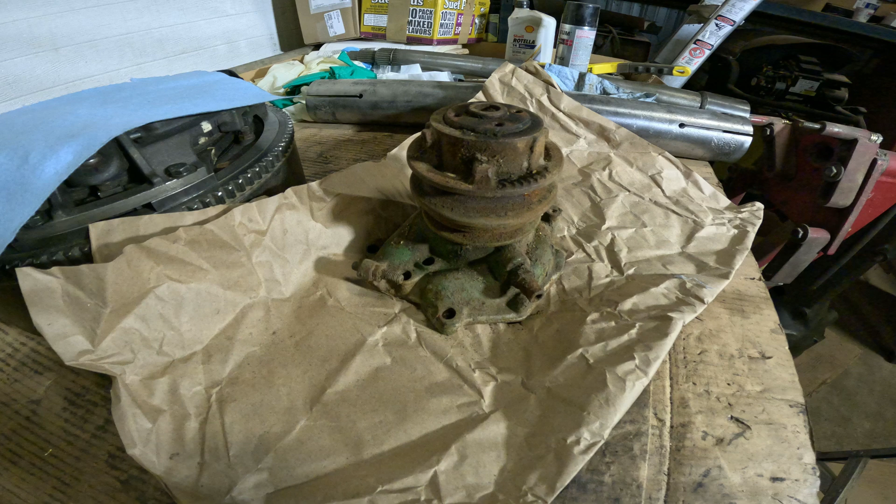In this video, we're going to document the rebuilding of our water pump that we pulled from our John Deere 430 two-cylinder tractor. This water pump would be the same style used on a 420, 430, or 440 from the Dubuque tractor series of 1956-57 through roughly 1960.

Essentially, all we need to do is drop a little money on it for some new seals and gaskets, and we're going to hit it with a little elbow grease, liberal coating of that. Bet you didn't know it came in an aerosol. And after that, an undetermined amount of time later, we should have a rebuilt water pump.

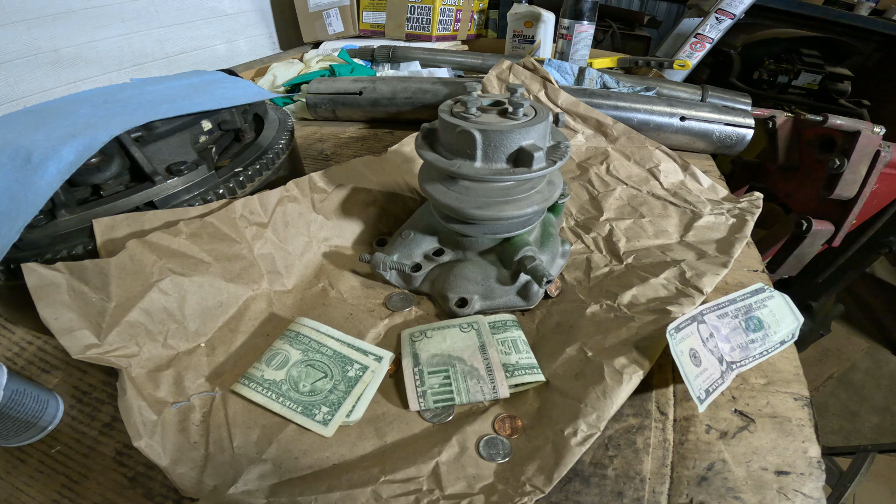That is the quick and simple version. If you're content with that, stop the video now. If you'd like to see what we did to get in the inside and pull everything apart, keep watching, because all those details are what's coming up next.

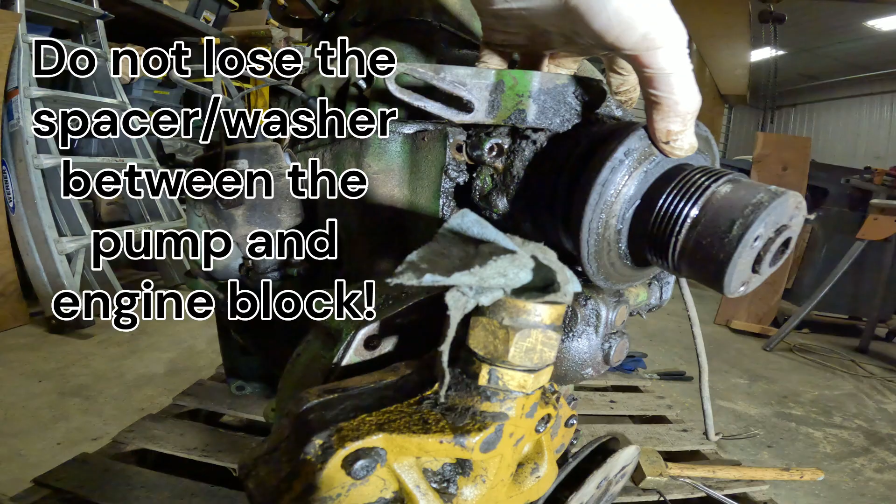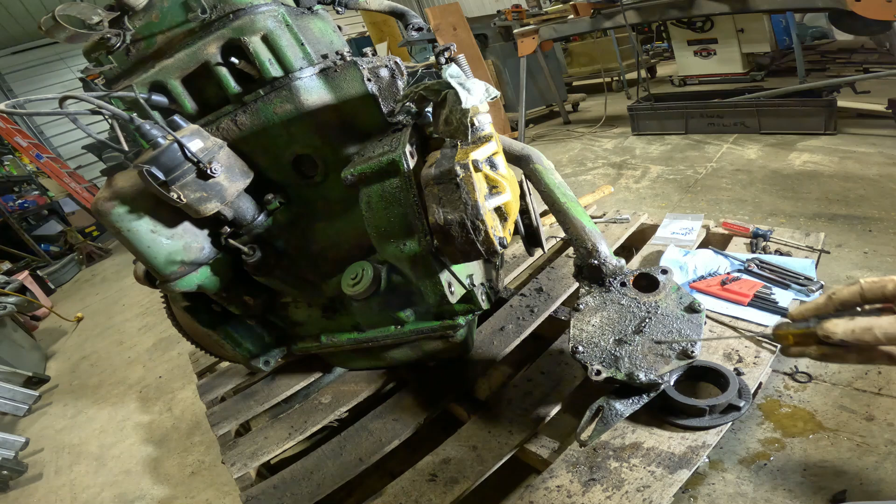Our water pump off the block, we can go ahead and take apart the return line, these two screws there and there, and then we'll start with removing this back cover with some Phillips head screws. That'll give us a view of our impeller and all the other fun things inside. We can also go ahead and pull our generator bracket off of here at the same time.

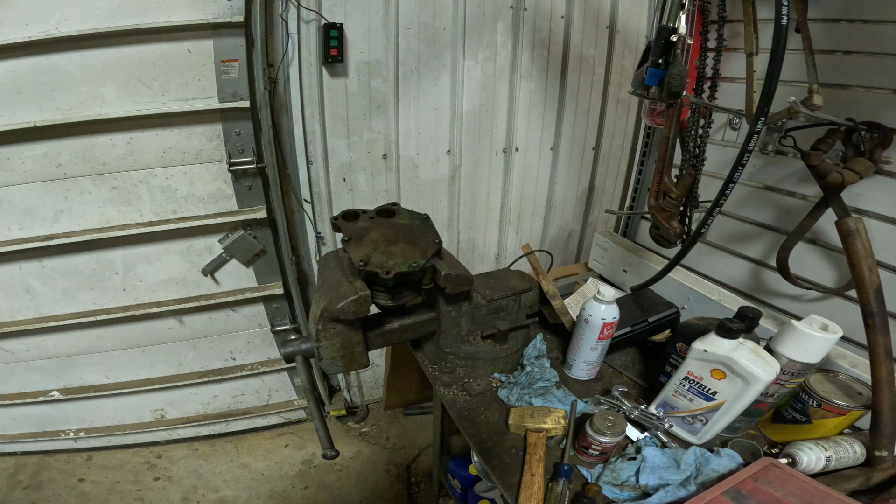We've taken a field trip over to the vise, locked our water pump in place to give us something to turn our screws against instead of having it flopping all around. I removed the cast return pipe that was mounted here with the two Allen head screws. Came off fairly easy. These big screws, you may get them out easy. I'll give them a little tap with the hammer, and you can try the screwdriver approach.

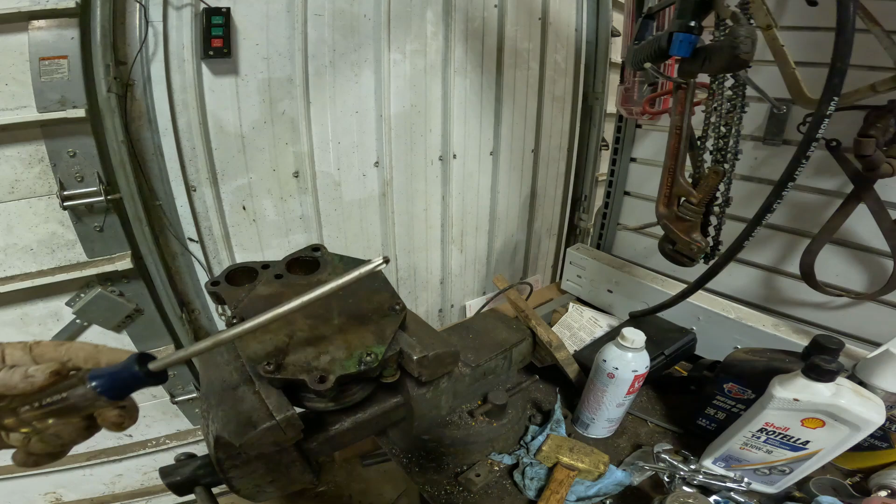I tend to get a little Phillips head bit that has an angle to the back end, and I'll use my socket wrench to give me a little more torque and turning, because they can be in there kind of snug sometimes. So let's see what we get.

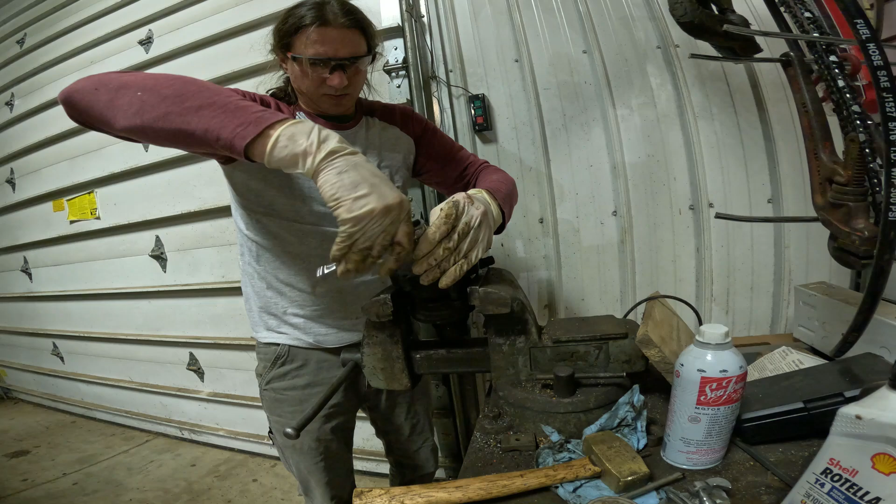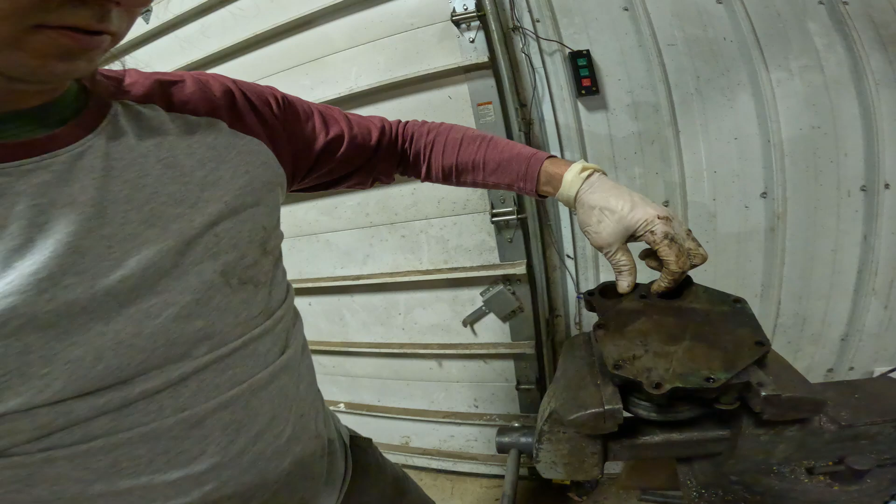We'll get this screw out. We'll pop our back cover off. We'll see how corroded it is, see what our impeller looks like that's waiting underneath here. Don't want you to miss the moment of truth. Oh, not as bad as I thought it was going to be. I'll throw that in the blast cabinet. It'll clean up well enough.

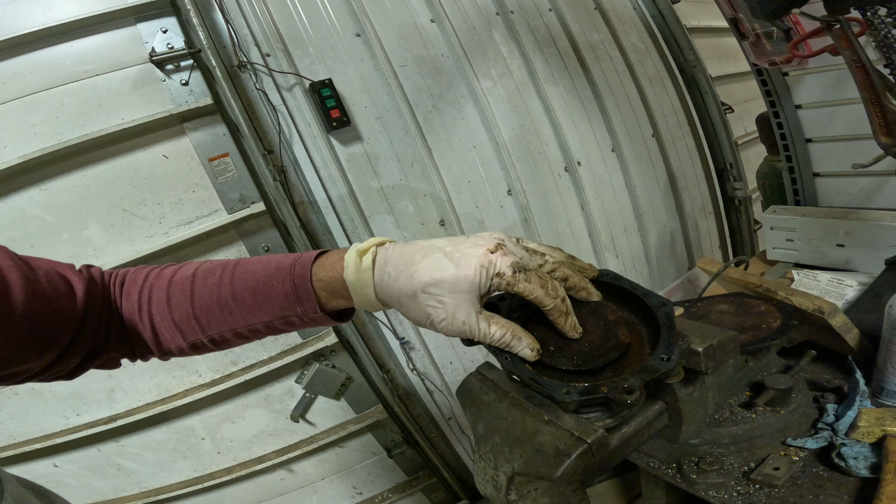Got our impeller, the shaft that the impeller rides on. One of the next things we have to do is remove our pulley from the opposite side. There is a clip on the inside underneath that pulley that holds the whole shaft in place. So we'll do some digging to see what we can do to get that pulley off the front.

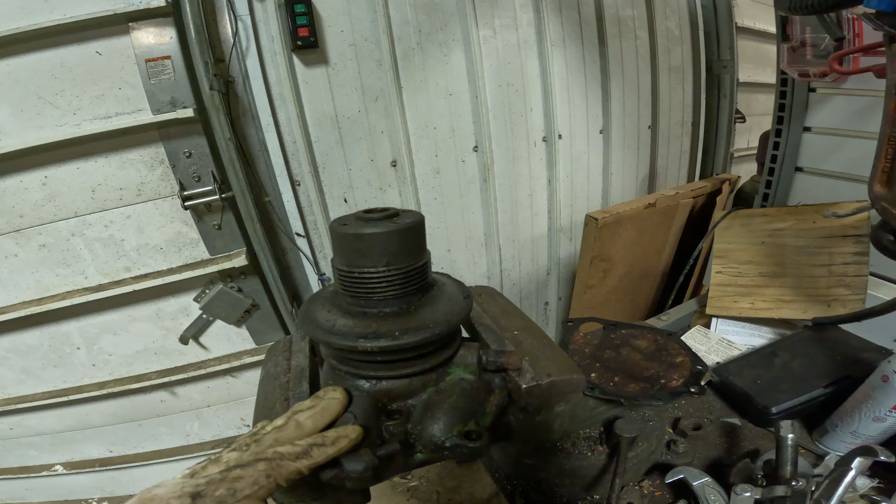To remove the pulley from the shaft on the water pump, I'm going to use a standard gear puller. The hooks of the gear puller are going to pull against the pulley and push against the shaft on the inside and pull it up. The push point of the puller is too big for the opening, so I'm going to take this little 5/16 bolt. Got the little nut on the end to give it a little bit of a dish. We'll drop that in there as a push point and see if we can't coax this guy to come off.

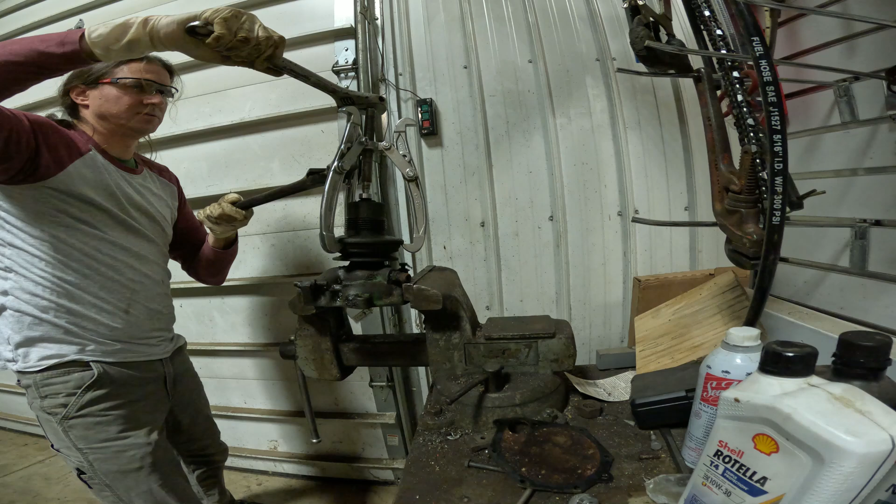Patience and persistence. Once I get this to the point where that nut is not enough height, I'm going to back this off. I think that's about where we're at. Back this guy off. Make sure you can see what I'm doing here. We are going to stack another nut up inside there. Now, put him on there.

Still not perfect. I'm sure there's a better way. You get that two-jaw puller that sits right down in there against that shaft, you might be far and away better off, but sometimes you gotta work with what you got. That's what we're doing today.

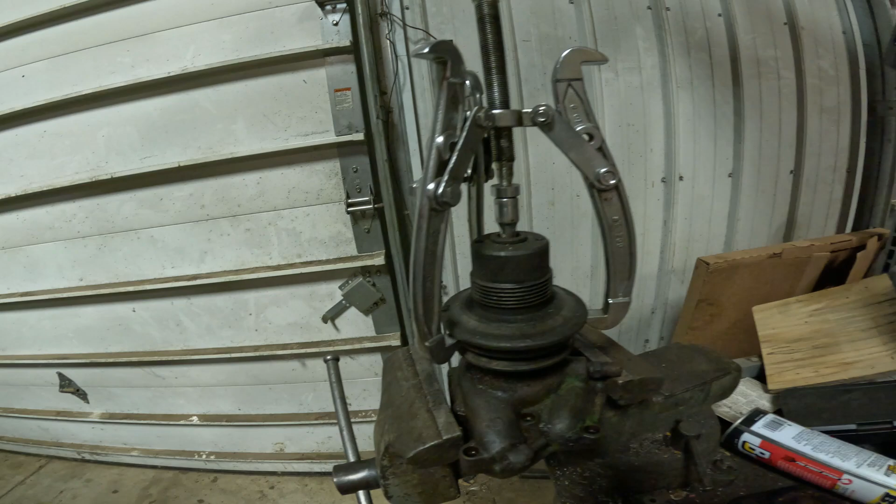We're starting to run out of clearance with all our nuts, so we swapped the nuts out for a small 3/8 socket extension, which is going to act again as a point to push on. And I think we're actually getting somewhere. Oh yeah. All that effort just to get our pulley off of that little shaft.

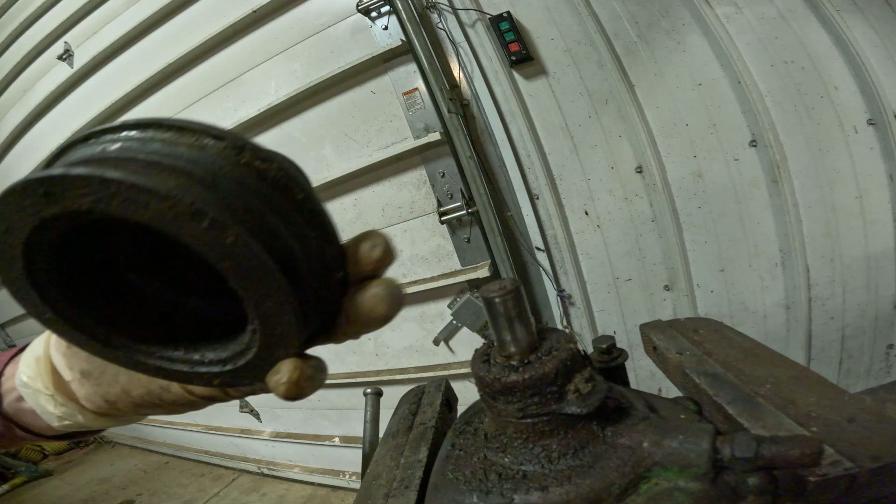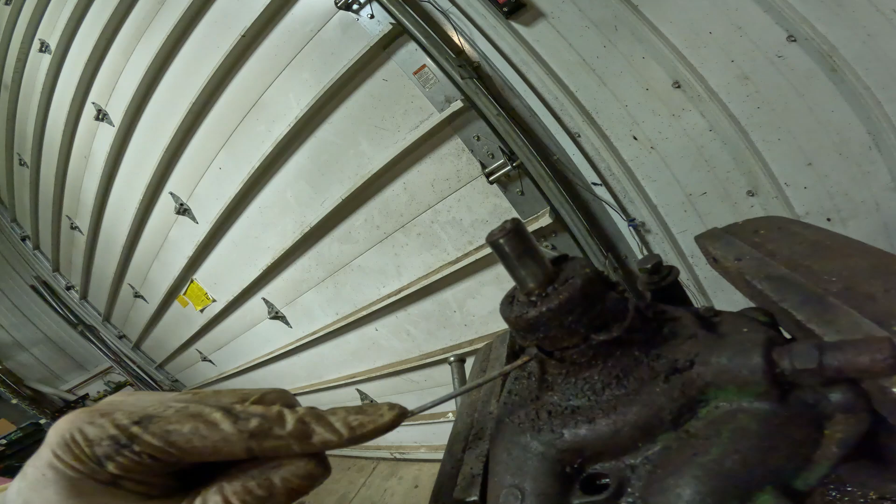Pulley, shaft, you can see how far up we had to pull them off of there. You can also, depending on how the lighting is, see this little clip. This clip right here, probably can't see, I'm up too close. That clip is what holds our bearing unit in the water pump housing. So we'll see what we can do to tease him out of there. These sometimes really get stuck in there.

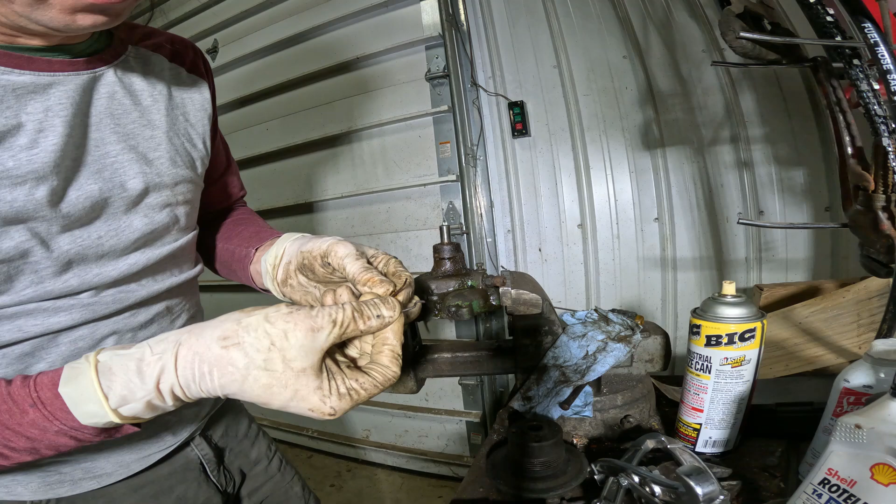Well, something's giving a little bit. There we are. As you can see, I might be able to salvage that. It's just a little bend in there. Probably what it should look like. So that should give us the ability to tap our shaft unit free of our housing. Now,

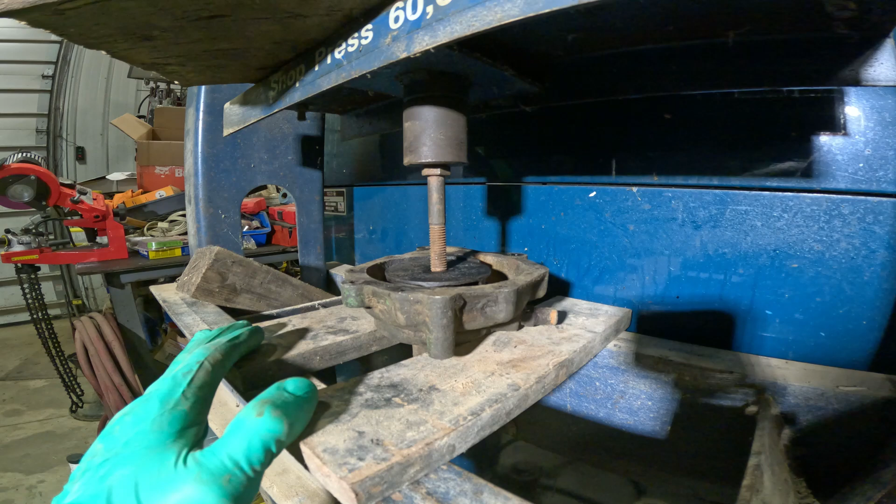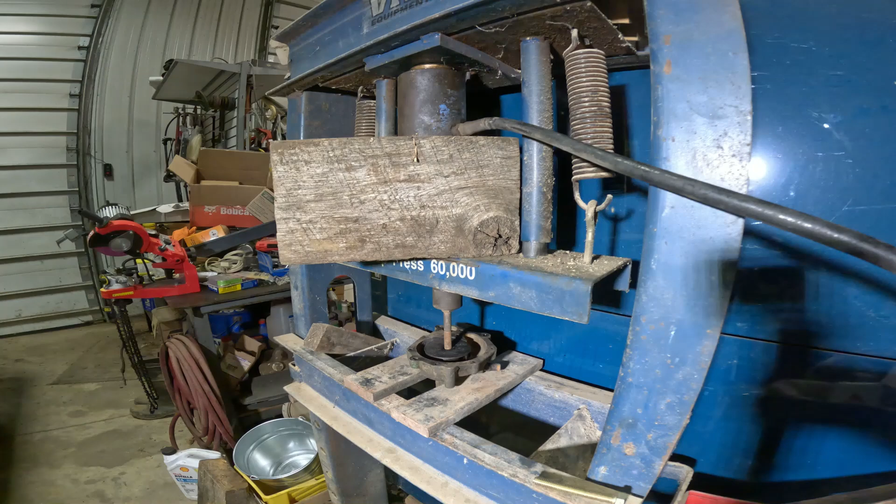we are set up in my little shop press, and our goal today is to use hydraulic power to push down on this bolt, push it down through the impeller and out of the water pump housing. I had to make a little modification to my press. I don't know if it's going to work.

My Amish neighbor borrowed my bottle jack, has yet to bring it back. Got to keep an eye on those Amish. They can be sneaky that way.

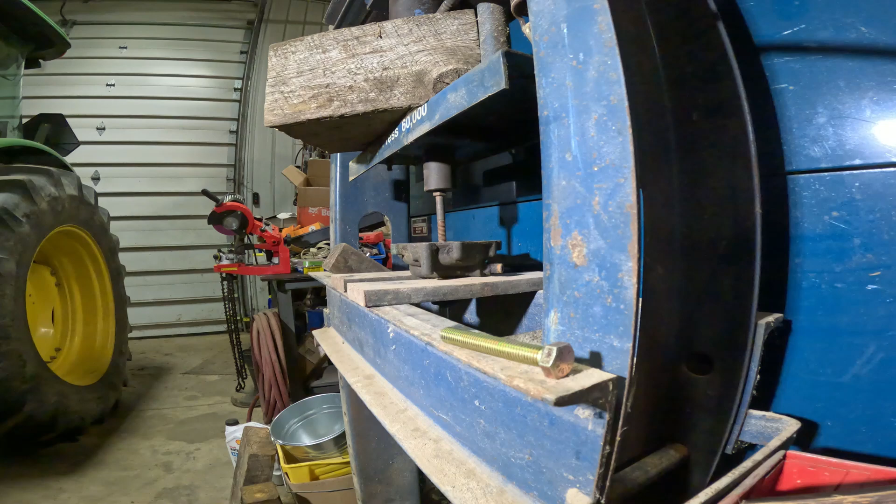But we're going to give it a shot, see what happens. I'm going to stand back way out of the way. One of the things you got to keep track of is that this bolt doesn't start to get a lean or a tilt to it. We want to make sure everything's vertical. Putting the pressure down, if we start seeing some tilting or leaning, there's a good chance this could pop out and be a projectile, which, safety first.

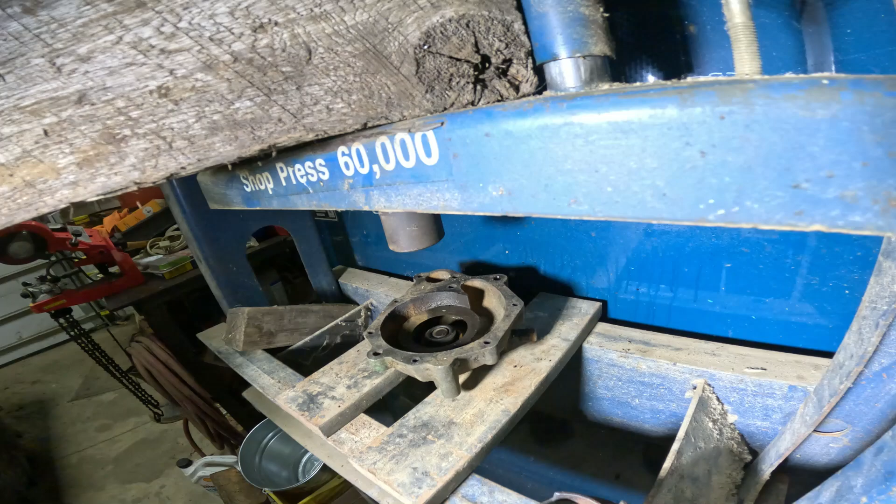That's a good pop. There we go. Hydraulic power did the job. Little creativity helping us make some progress. I think that's freed up enough that we can take out our impeller. That part's free. We still have to finish pushing the shaft the rest of the way out of the housing there. For that, I may be able to use this longer bolt.

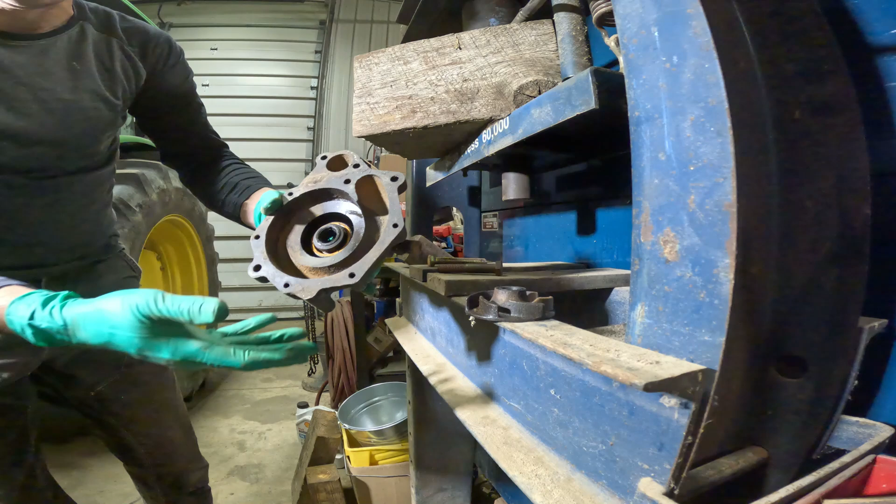Perfect. Just like the script was written. We got our shaft assembly out here. We have our water pump seal. We're going to pull that out and replace it.

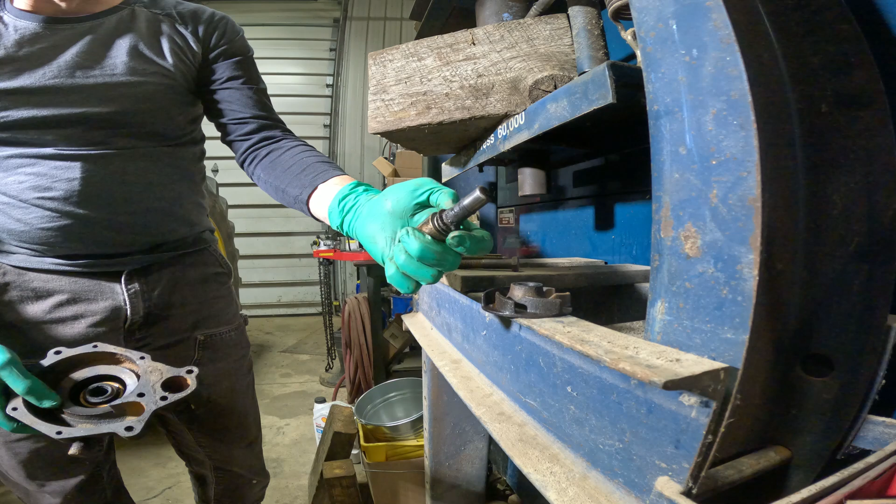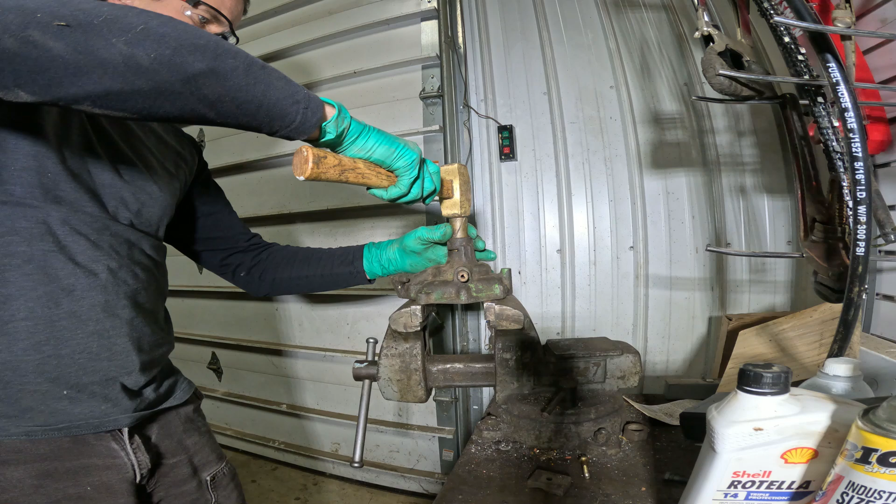I've got a new bearing and shaft assembly to use here. One thing we got to keep track of is this little ring on the end. I believe that's called a slinger. I'm not sure if I have to reuse that one or if it comes on the new bearing assembly. We shall see. But before we get into doing our cleaning, we'll go ahead and pop that seal out of the front of this housing here, and that's just a simple process of taking a punch, putting it in there, popping them out.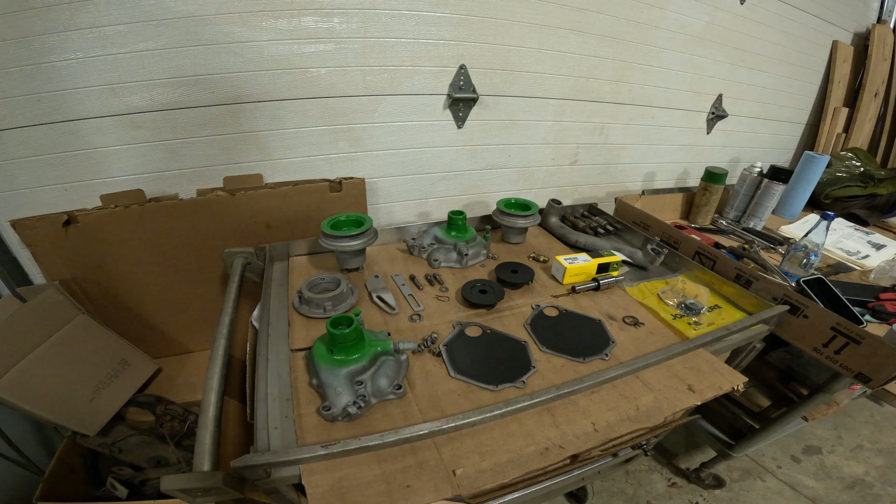Our water pump parts are clean, prepped, ready for reassembly. You'll notice that things have multiplied. I have a working tractor that's got a leaky water pump, so I thought now's the perfect time to pull one out of storage, tear it apart, do a rebuild on it as well.

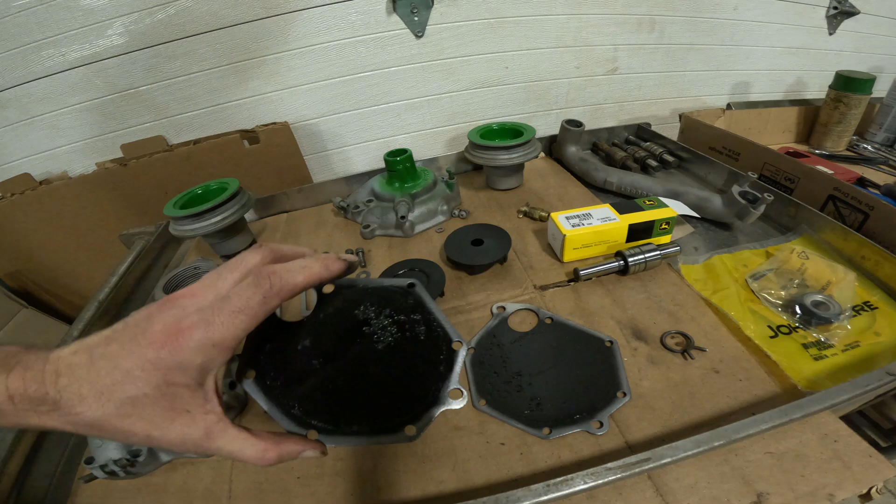You'll notice there's some color sprayed to certain areas. These are spots that I won't be able to hit with the spray gun later once everything's back together. Kind of help with the corrosion process, at least avoiding it. I did go ahead and target some of the insides as well, for better or for worse. They'll probably just flake off once coolant's flowing through there, but thought I'd try to at least minimize the rustiness that may occur on the inside.

I do have a new bearing and shaft assembly, a new seal, a new gasket. These were all available through John Deere. I'll need to order a second set for the second pump because it was an afterthought, but we'll get there. So with that, we'll start putting some stuff back together. We're going to move over to the press. We're going to start with maybe putting our seal in and take it from there.

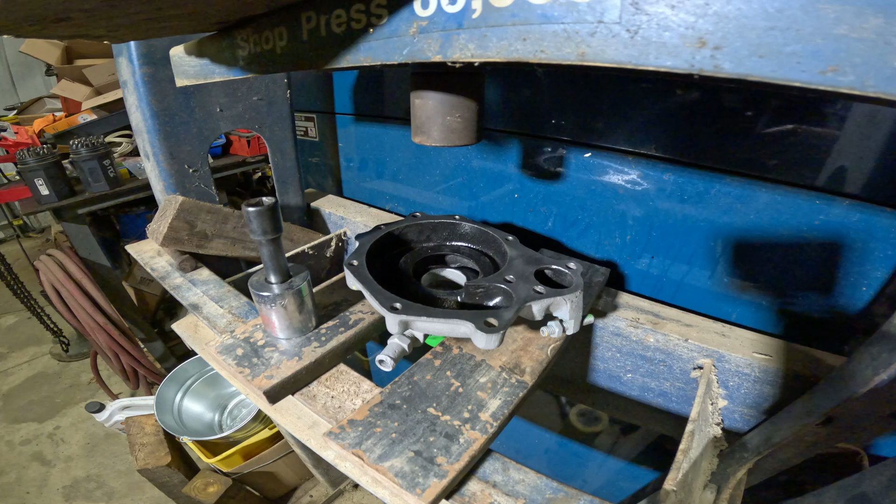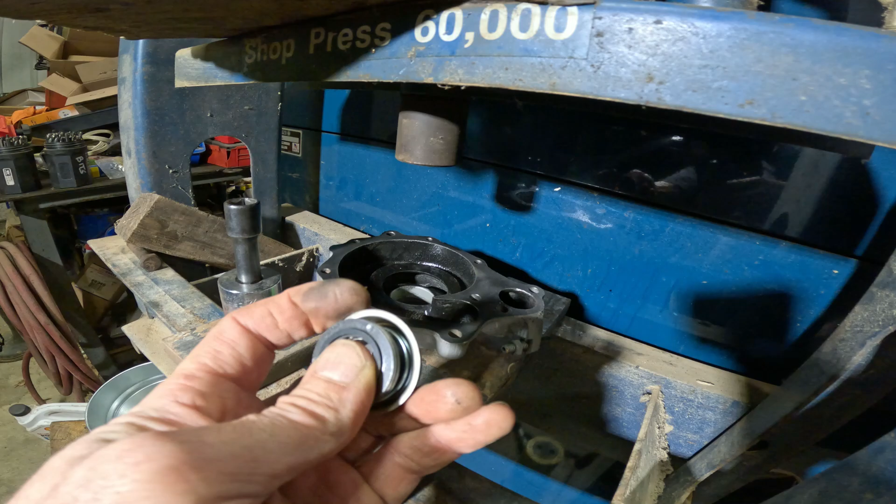Here at the press, we want to push in our new water pump seal into this little recess inside the pump housing. To do that, the manual says we should get a tubular driver that only contacts this outside metal edge. I don't have any fancy tools that might fit that description, so I'm just going to go ahead and use this 1¼ inch socket, which seems like it fits right around there nicely.

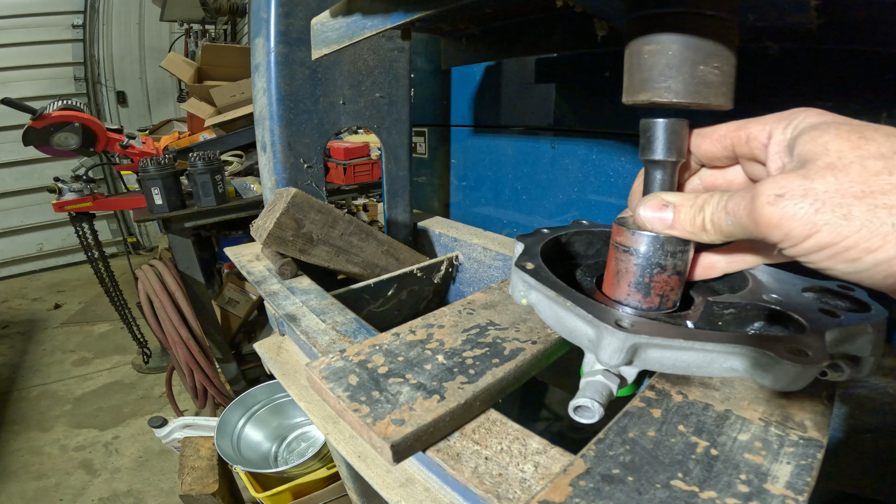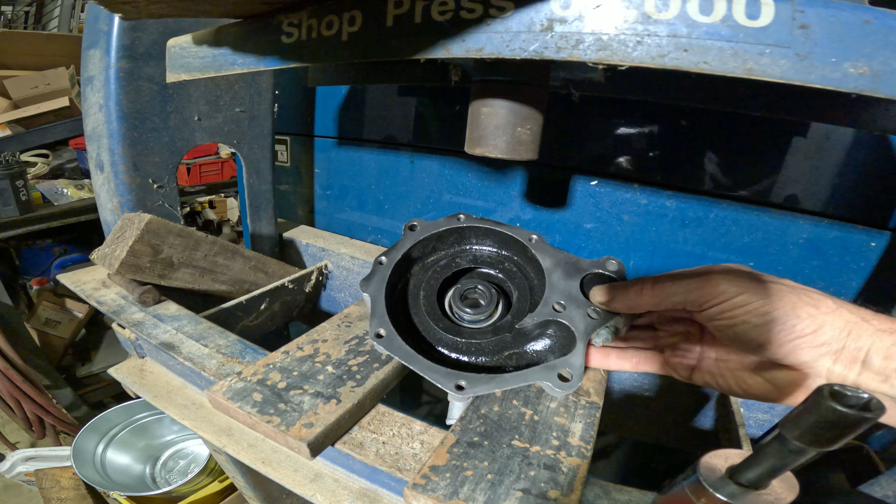Line everything up. Put our seal down in there. Our little socket on top, and let's see if we can push him in place. It should go in pretty easy once it's seated. Yeah, it'll level out and we'll start to feel a little bit of resistance just like that. So release pressure. Looks good. Seal installed. I believe the shaft is next.

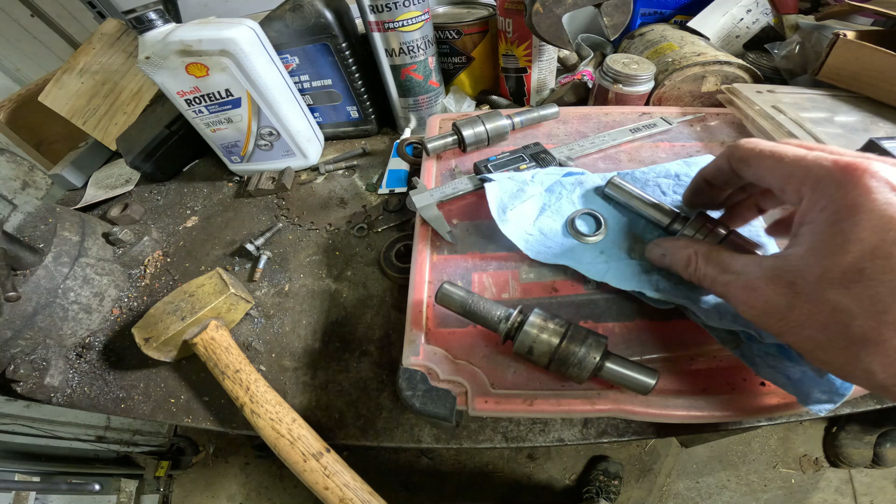Before I install my new shaft and bearing in the water pump housing, I need to put this little part they call a slinger on the end here. I pulled it from this original shaft and bearing, drew a little line where the edge was before I removed it. And I've also got this other shaft and bearing that's got a slinger still affixed to it. The manual says about 1.5 inches from that lip to the end of the shaft. We can always measure that once we get it started.

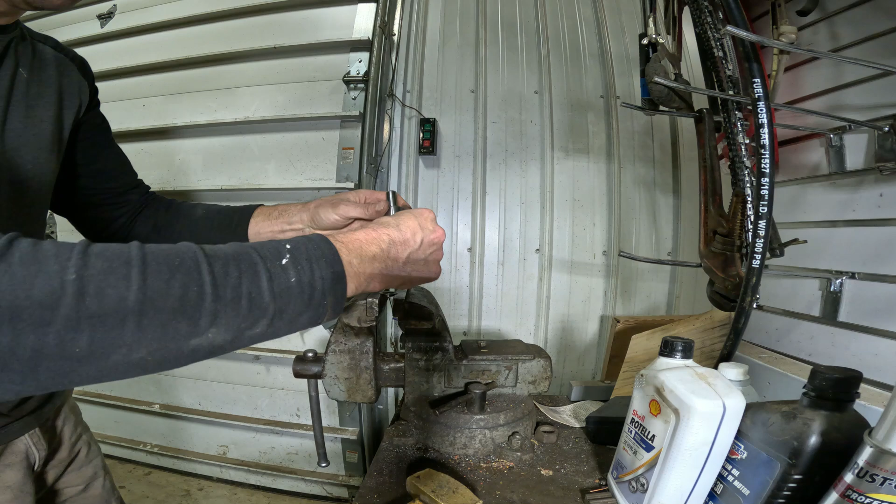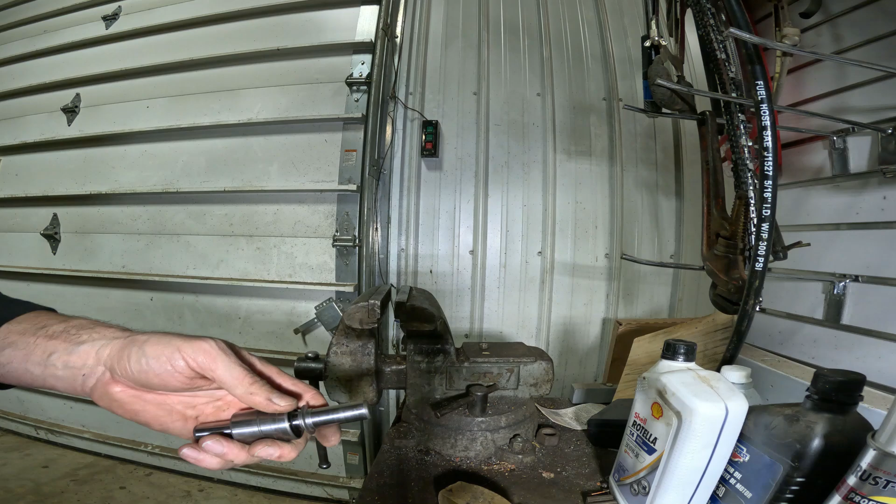Do that. Gonna set it up on the vise here. Shouldn't take too much to get this on there. I think I can. There we go. Maybe that's a good thing, maybe it's a bad thing that it's loose. It took a little more convincing than that to get it off the other original, but there was a pretty good amount of corrosion in there.

Zero our caliper. You can see this isn't the most precise way of measuring it, but I think we're getting a pretty good idea. We're right about there. So we'll take that 1.5 inches.

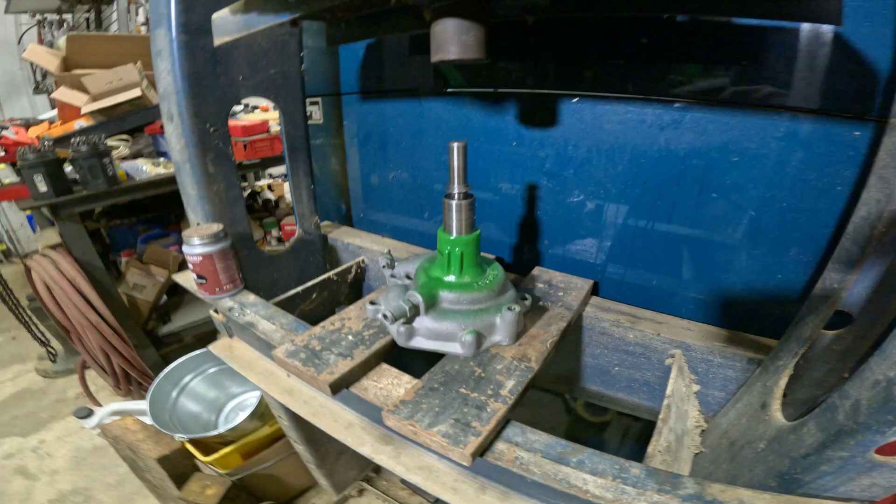We are now going to press our shaft and bearing into our housing. So we'll put our little fancy driver there. Shouldn't be too much resistance to this one. It should, yeah, slide down in pretty easy. Especially when it's straight.

Like with the seal, we should get some resistance once we're seated, but the other thing we can watch for is our groove. That's going to line up with that opening in the housing where our clip's going to rest, and I think we're getting pretty close there. Grab the light up above here and take a look in there. Yeah, you can see the groove centered right there.

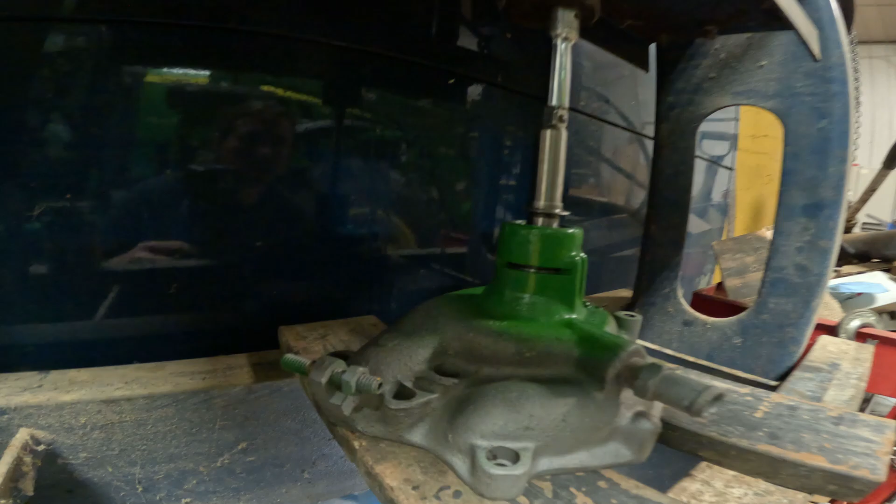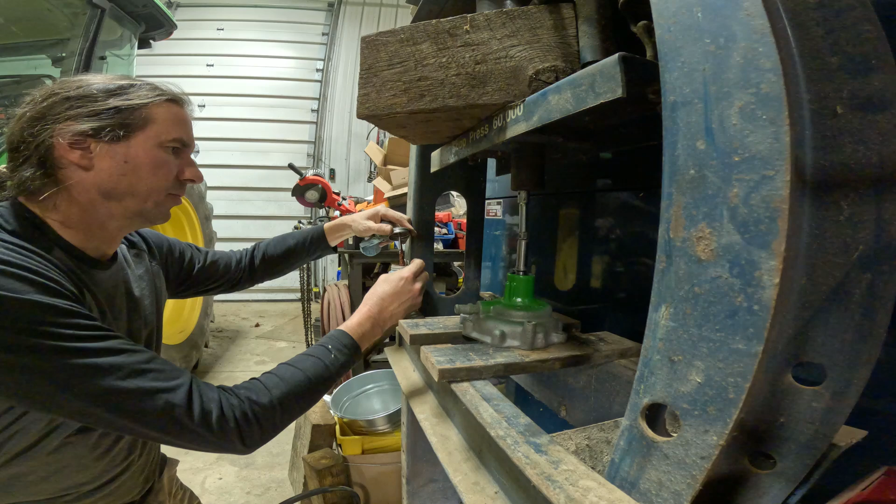So we will get our little clip. I don't know if this is a good idea or bad idea. I'm going to try putting a little bit of Never-Seez on the end of that, as hard as those come out sometimes. The clip goes in a way where this little part here will fit in this notch, and, there we go, just like that. That's going to hold our shaft and bearing in place in our housing.

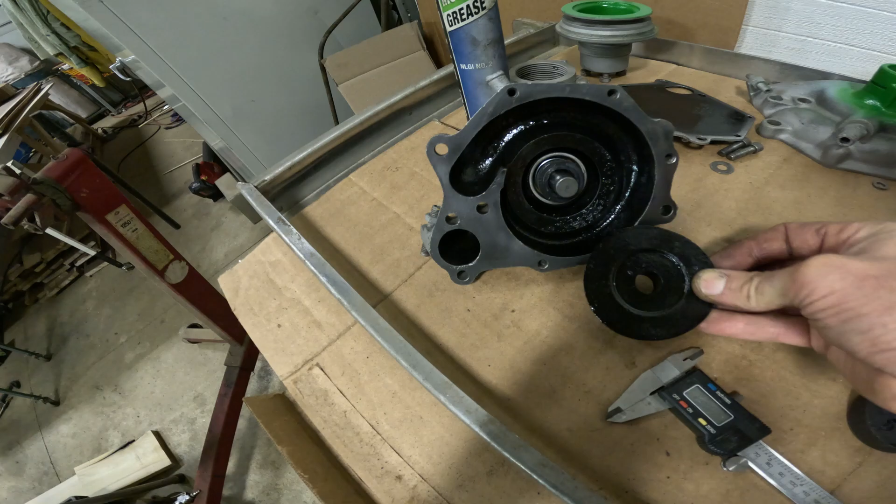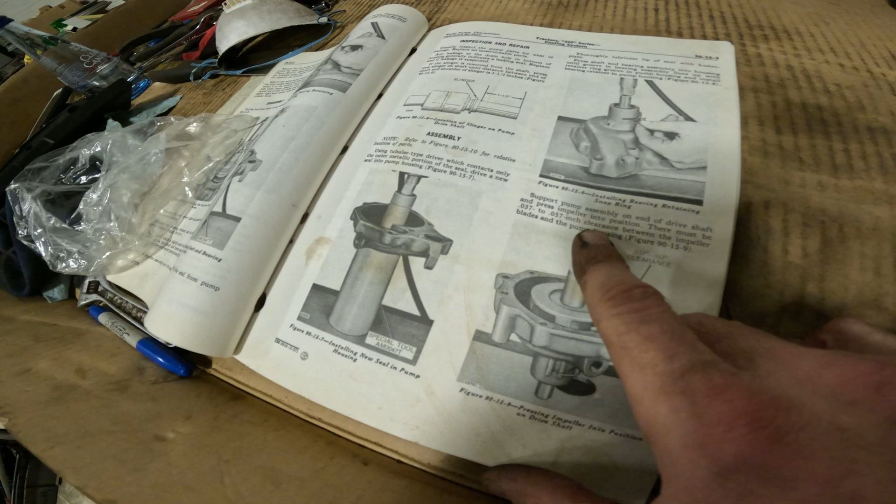Next we are going to press our impeller onto the shaft here. Before getting too far with that, it's worth noting in the service manual that there are some clearances we have to pay attention to: 0.037 to 0.057 inch between the impeller blades and the inside of the pump. So what I've done is got my little feeler gauges, and I'm going to set it up to 0.047, right in between. Use that as a guide to make sure we're not too deep.

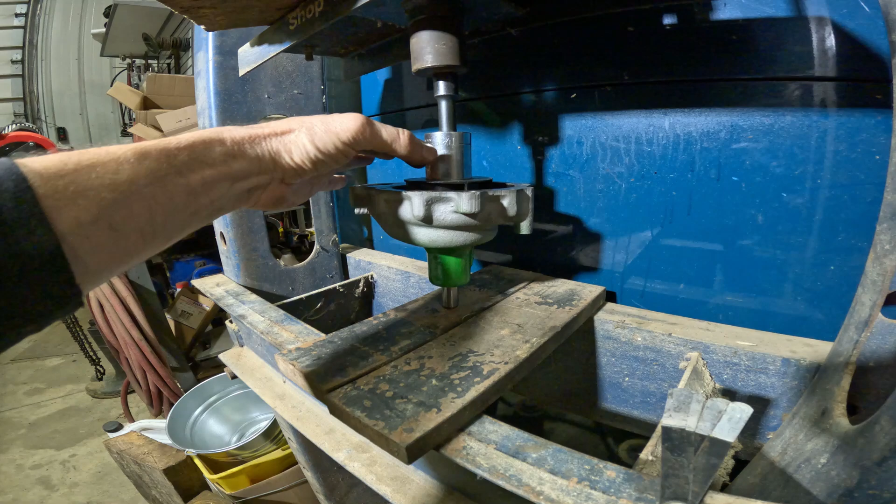Pushing the impeller in place requires a little balance because we are actually pushing against the shaft. I have this set up with our 1 1/4 socket pushing down on the impeller. We're going to drive it down a little bit and then check our clearances once we feel like we're getting close to our target. Too far and the blades of the impeller will rub against the housing on the inside. Not far enough, and we'll rub against the plate on the back side.

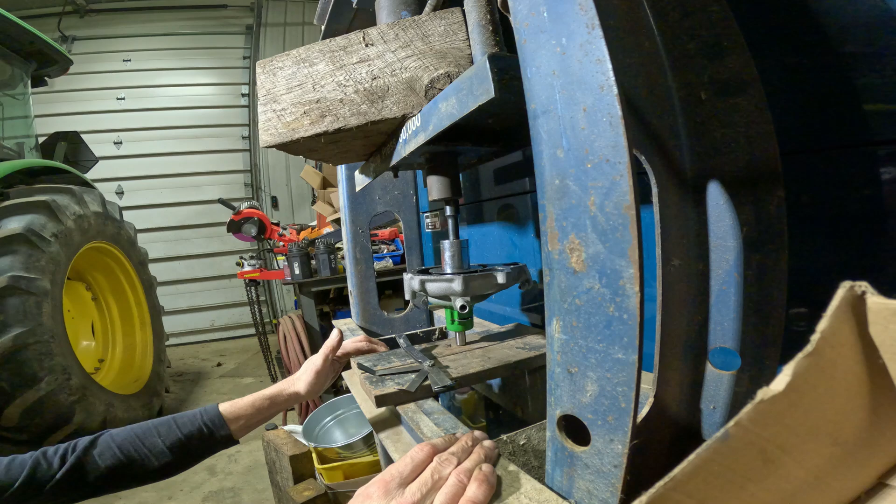I think we're okay there. That's at 0.047. There's probably an easier spot to check it right in there. So I'm not quite getting in there yet, so it's a little tighter. Let's do 0.034. Plenty of room there. So I know I'm probably not to my 0.037 yet. I'm going to, at this stage, back my press off and see how my plate fits on the back, just to make sure we've got enough clearance, because we might be in position right there.

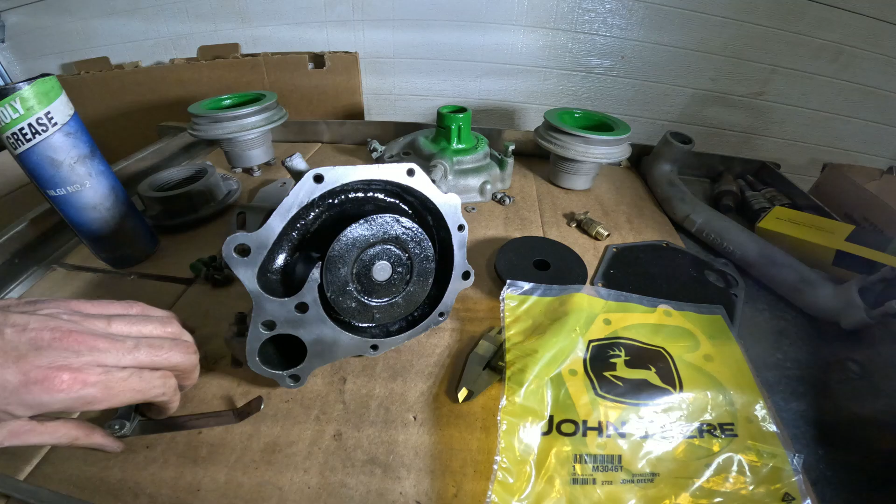After a little behind the scenes testing and fitting, I've got our gauge 0.018 and 0.020, so essentially 0.038. Just a little bit above, and it's a snug 0.038 that fits in there. So we will call that good in terms of placement. The back of the impeller is fairly close to the plate, but we have to remember the gasket is going to sit in there too, and that's going to buy us a little bit of space as well. So happy with that.

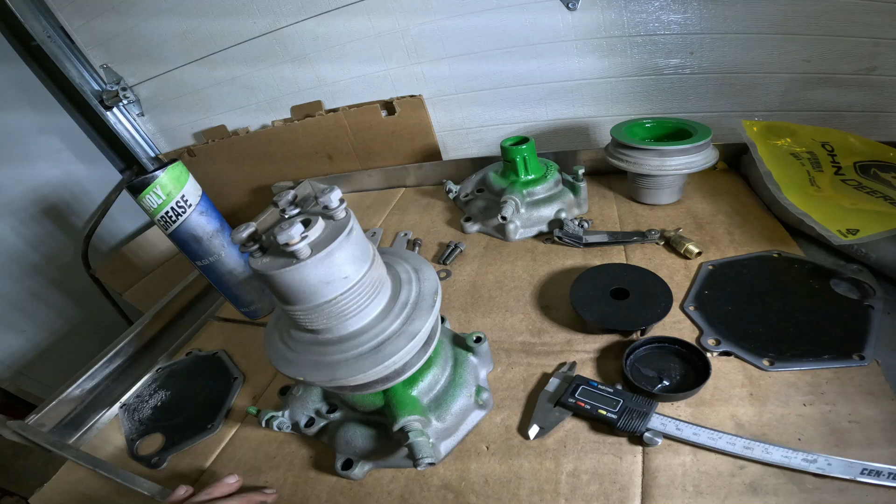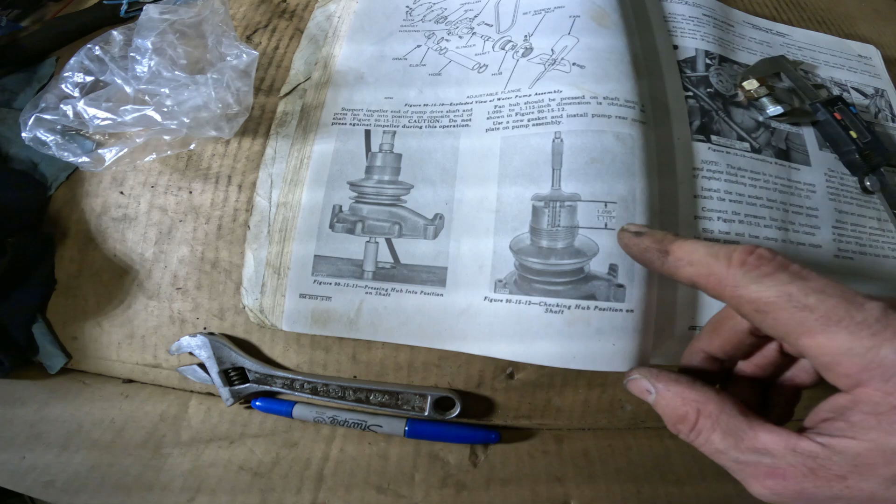Before we can put our rear plate and gasket on, we need to install our main pulley, because we have to use the shaft again as a push point when we press our pulley onto the pump. So we'll get that set up on the vise next. Before we press the pulley on the shaft, there's an important dimension to pay attention to. This is basically a little bit over 1 inch that we want in this space that's down in this hole.

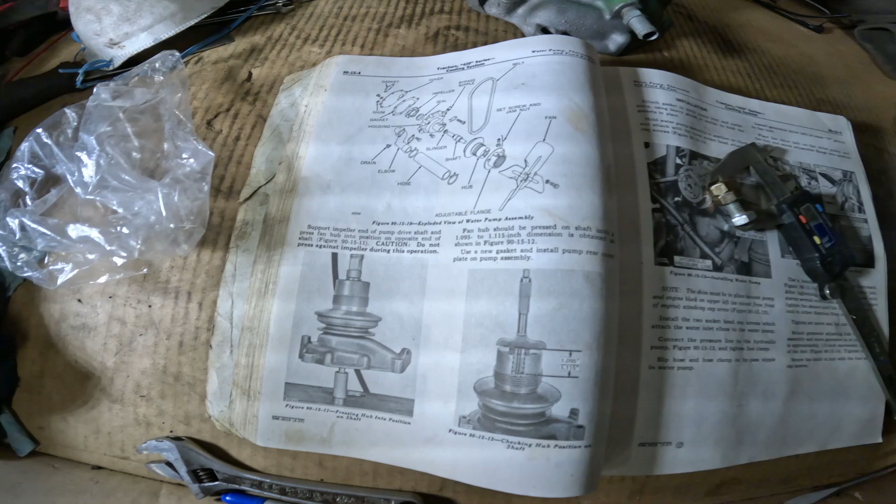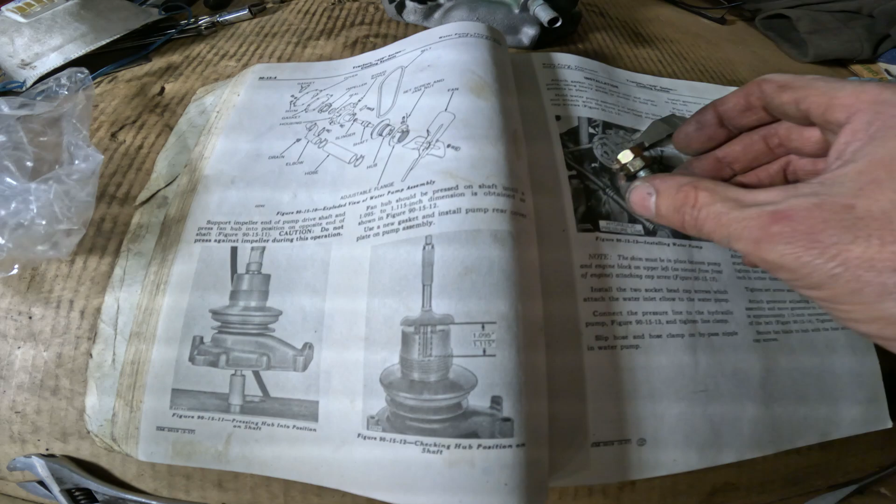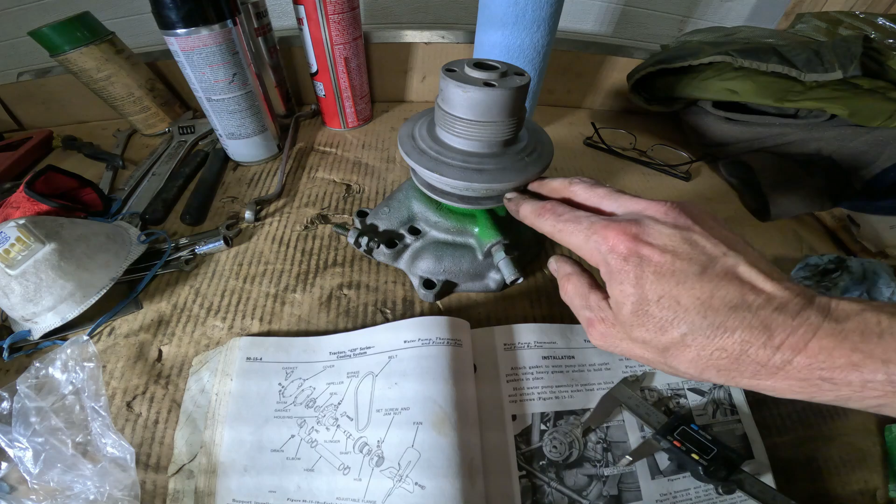And to accomplish that, I'm putting my pulley in place, and I've got this bolt and nut combo that's at 1.1 inches, sort of right in between the clearance mark. And we're going to drop that right in there, and then when we push down with a flat press across the top, once it hits that screw, that nut, it'll be at the point where the fan belts and alternator belts will all line up. So with that, press her on.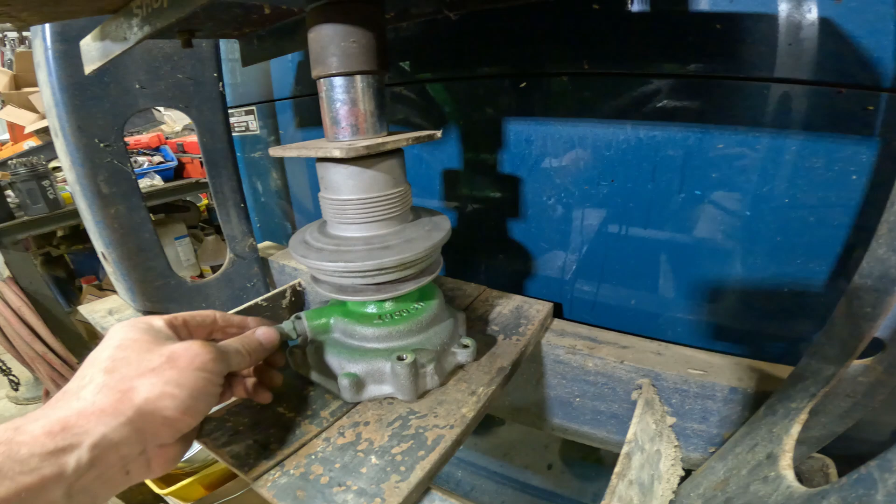Because we are once again putting pressure down on the shaft with this pulley, we need to use the bottom of the shaft as a push point. I have taped a nut on the bottom there so we are not pushing against the impeller when we're over on the press. The tape simply holds the nut in place because it's kind of hard to line up when you're trying to get it all sitting on the press just right. Pushing our pulley in place, we know our housing's free because it can still turn and we're up off the ground there.

And once we hit that little bolt and nut combo, it should stop our progress. We should feel it offer some resistance, which I think is where we've come. Flush right at the top, just like we planned.

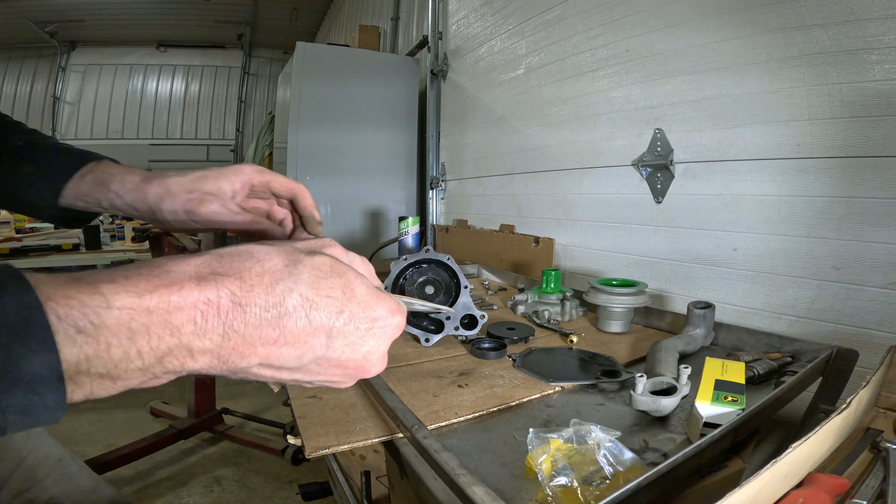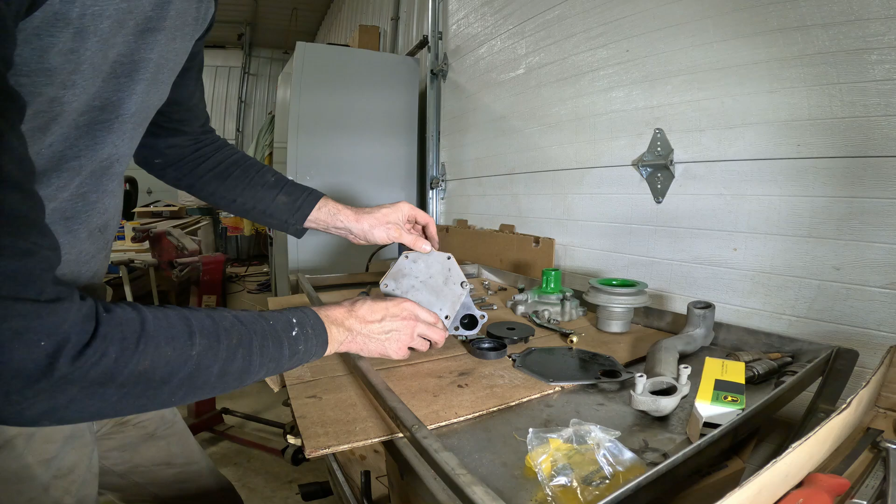With our pulley in place, we can put our new gasket on our back plate. It's kind of an optical illusion. You think the hole would line up with the water port hole. And with that, you have one rebuilt water pump.

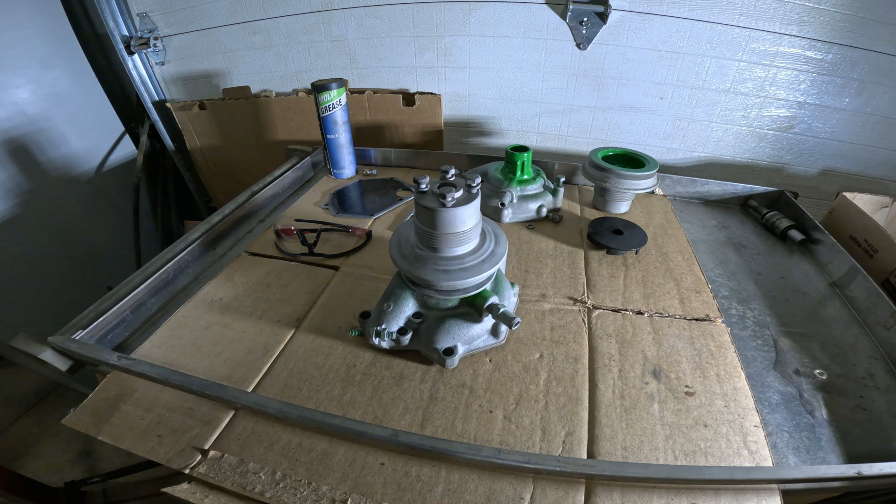That concludes the rebuild of this water pump used in a John Deere Model 420 or 430 tractor with a 2-cylinder engine. Now that that is done, we can swing back over to the engine and decide what part to take off and refurbish next.